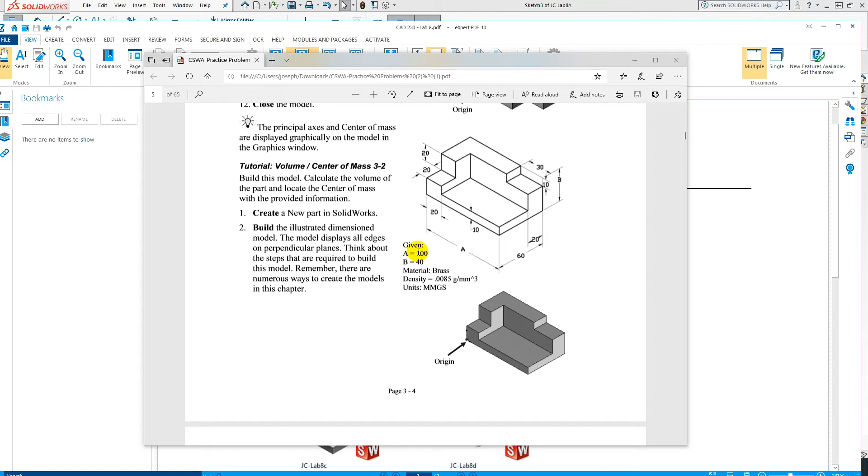Lab 8B. We're going to be modeling this part and then calculating out the mass property. We can find the dimensions for this in Lab 8 in the practice problems textbook, on page 3-4. And this is a metric drawing.

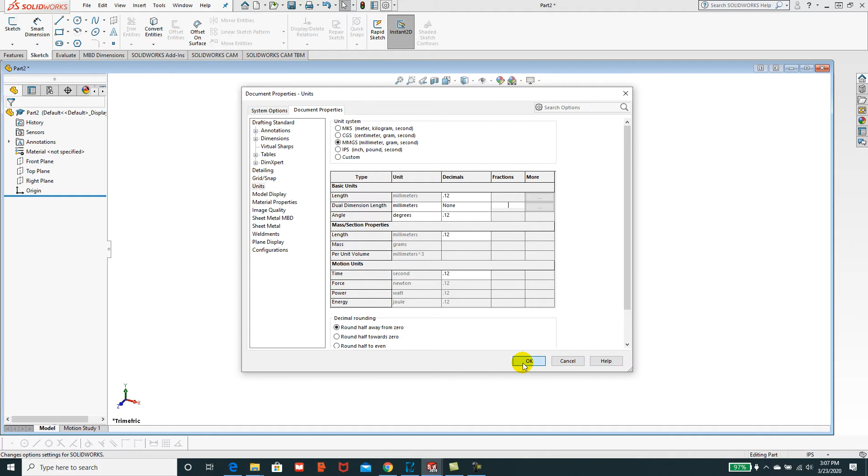Let's begin. We'll say File, New, create a part, plain white, document settings, document properties, units: MMGS, millimeters, grams, and seconds. Say OK. We'll see that that's been updated.

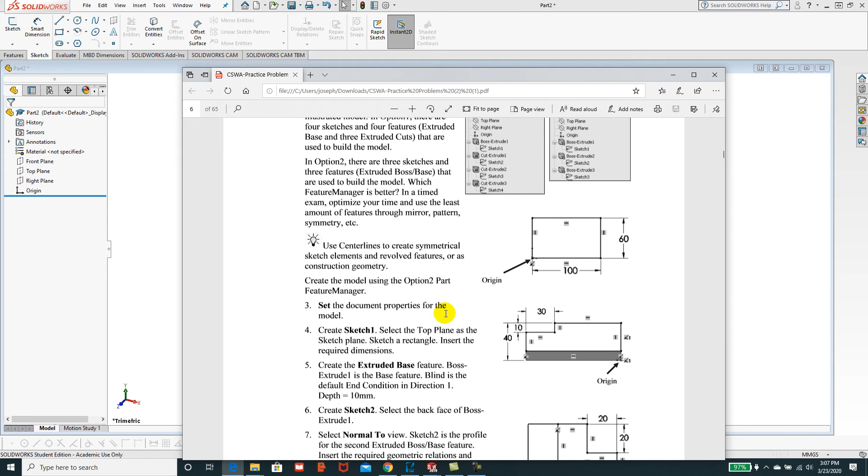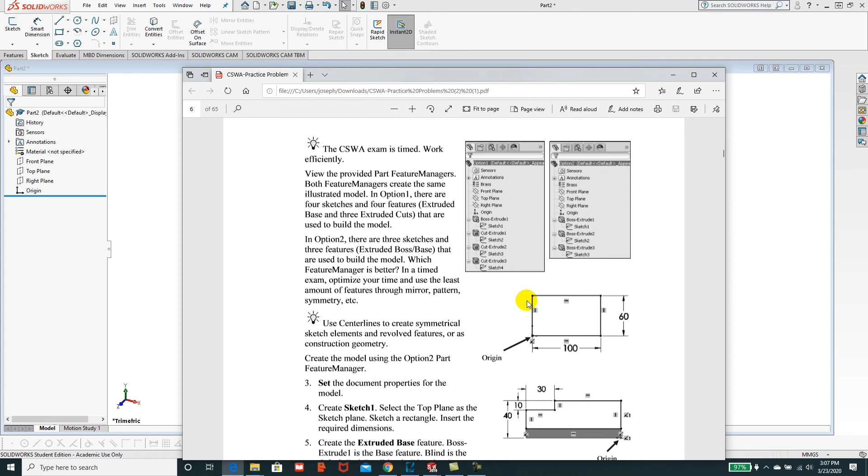And we'll create this model, create a new part, and we're looking for the origin. The origin is right here in the front left-hand corner, and it looks like they're starting it on the top plane. They're going to start off with a 100 by 60 millimeter rectangle. Then we're going to come into a side view and sketch a relief that will be cut from that. So we're going to have 100 by 60 - let's check that matches up, 60 and 100 - and then we'll extrude that a height of 40.

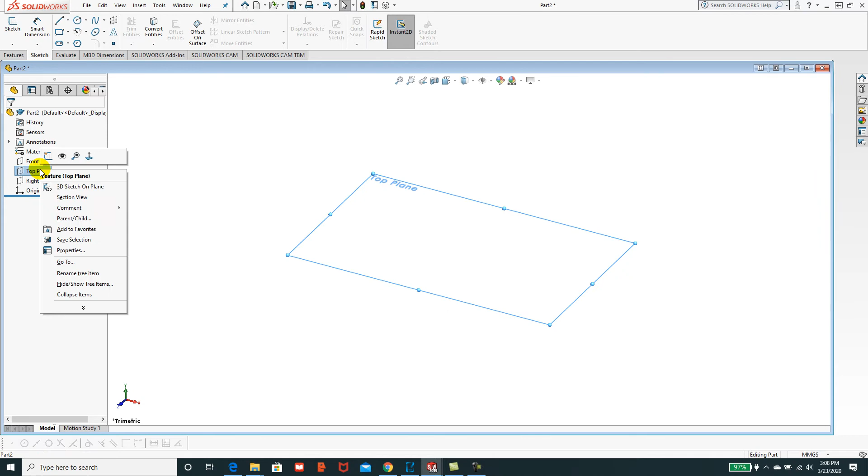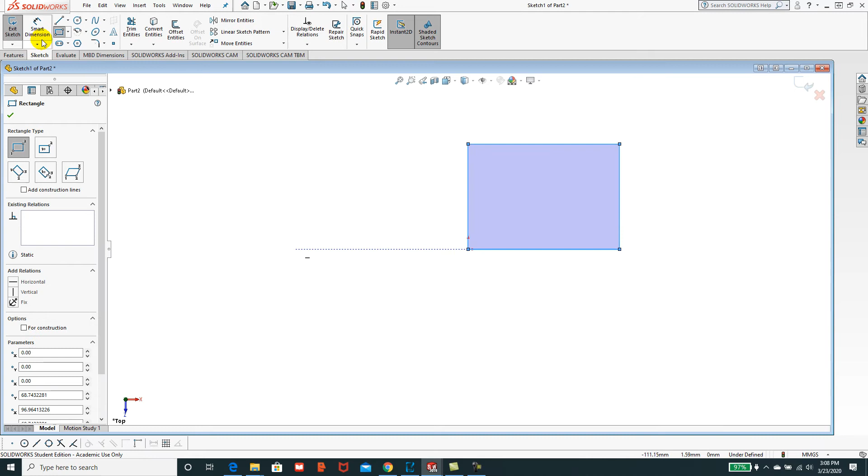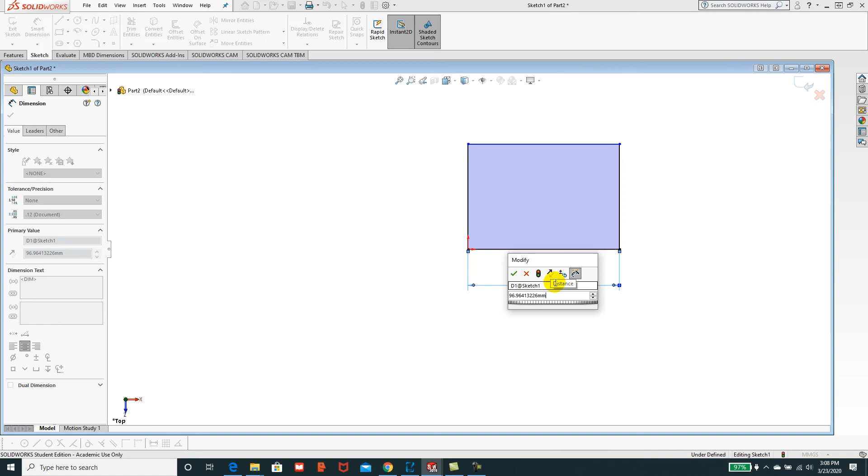Starting off in the top plane, right click, start a sketch, get a corner rectangle, and then we'll put our dimensions on that. I'm not sure why they're not taking - this one should be 100. It's because my number lock is not on.

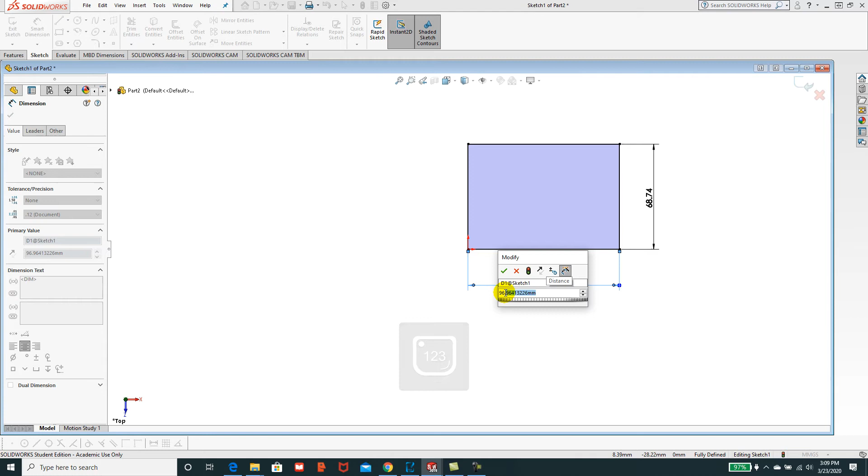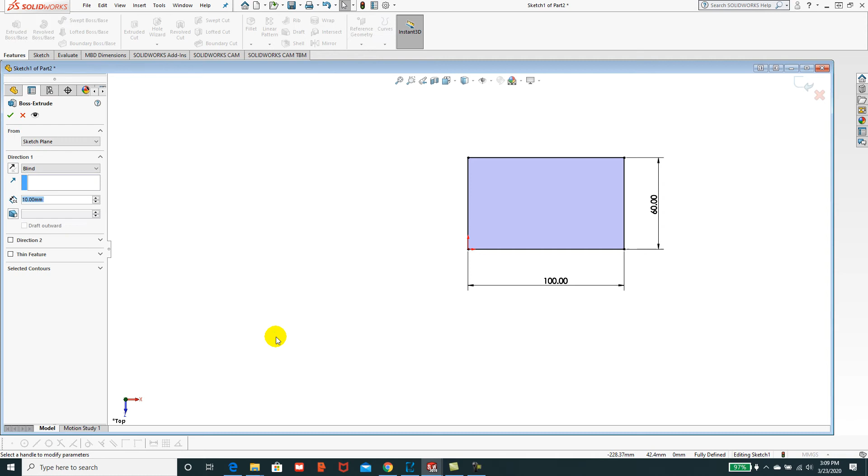And then we'll extrude that by going to Features, Extrude Boss Base, 40.

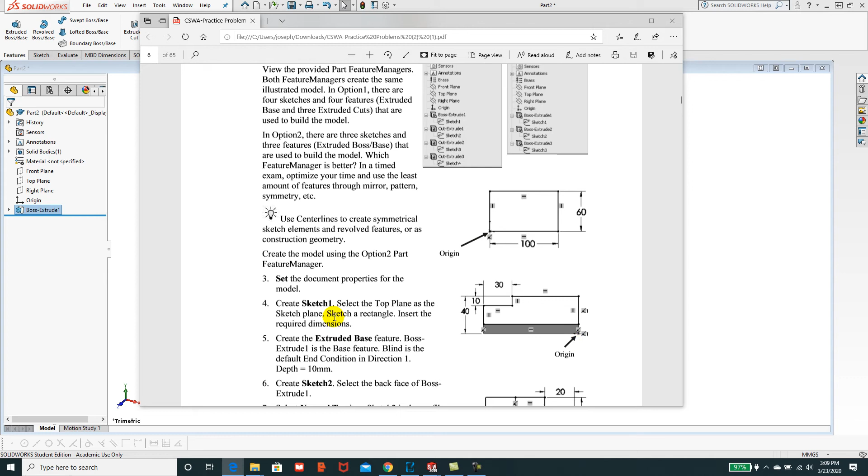We'll then go to the side view, and it looks like the origin's over here. It says create a sketch view in the top plane. Select the back face of the boss extrude. Let's just take a look at that. Okay, so we've got this extruded.

We could certainly just go and plunk some stuff down on the top with a perimeter of 20 millimeters this way and 20 millimeters that way. So let's do that.

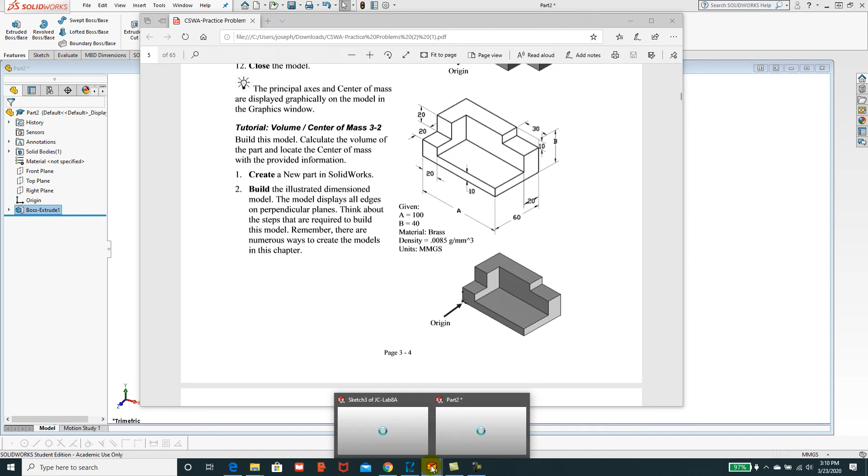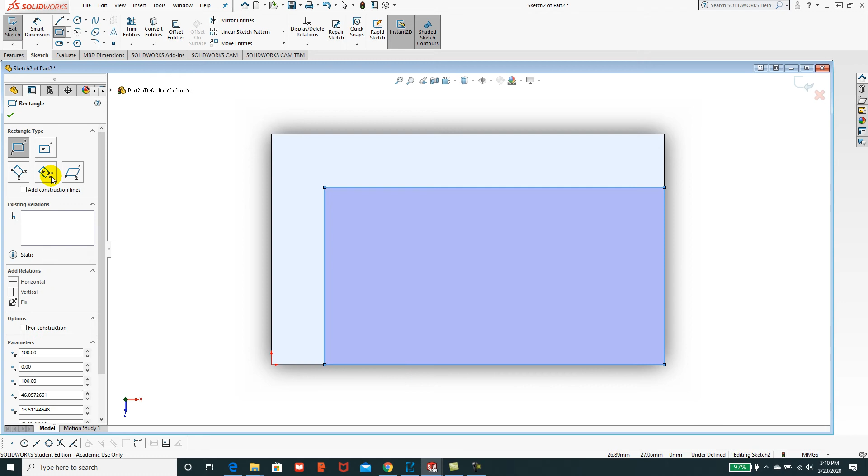Sketch on the top. Start a sketch. Spacebar. Normal To. Sketch. Rectangle. I'm just going to drag a rectangle like that. And I'm going to say we're going to have 20, and we're going to have 20.

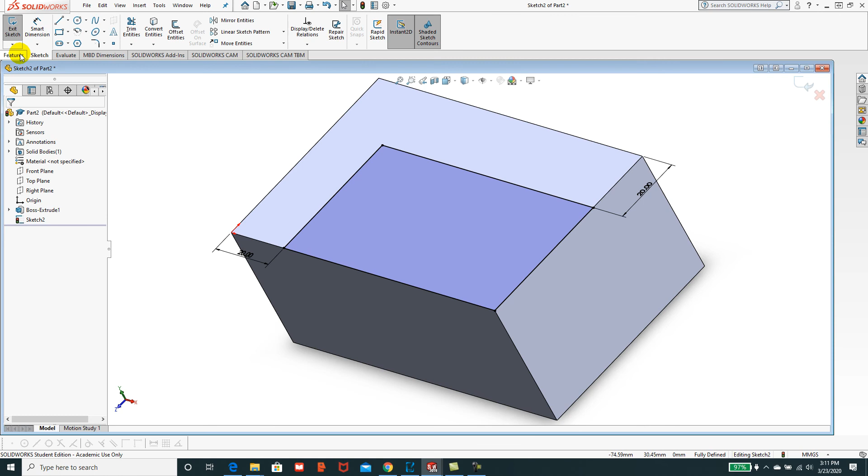And then we're going to extrude cut that. Let's take a look at how much. If that's 40 and we need to have 10, then we're going to take that down to 30. So we'll say Features, Extrude Cut, 30 millimeters, green check mark.

Great, take another look at our print. And then we're going to have a 20 by 20 by 20 cutout here and a 20 by 30 by 10. Since the depths are different, we're going to do those as two separate sketches.

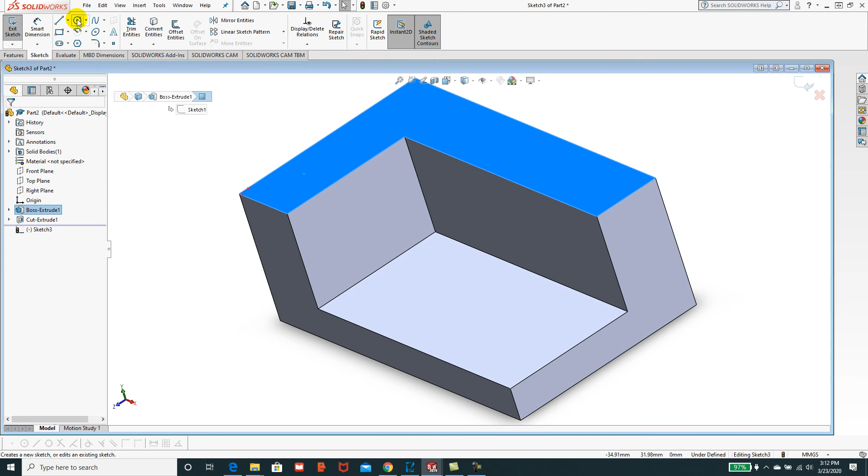We'll start off with this one. Click on the top surface to sketch, and then we're going to go and just drop that. Make sure you acquire the edge of that and the edge of that - they'll turn orange. And that fully defines that, so what we'll do now is extrude cut 20 millimeters.

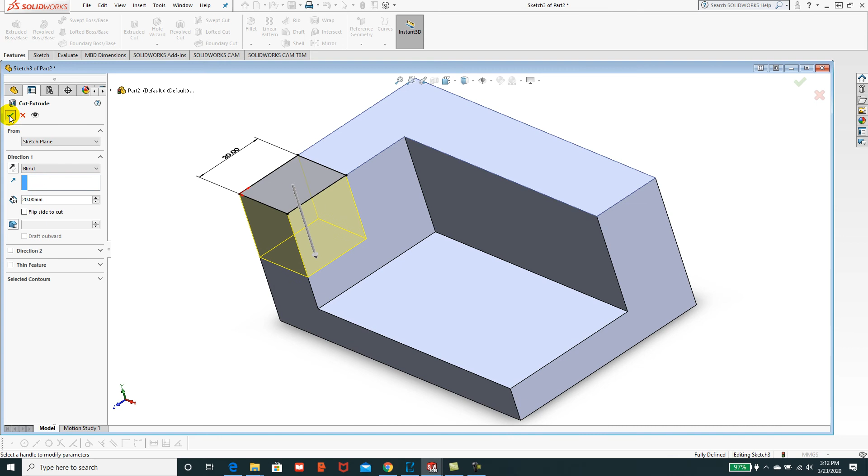And then we'll click over here, start another sketch, and create another rectangle. Acquire that edge, and then we'll take a look. And that's going to be 30 by 10 deep. Since the width is 20, as long as we grabbed it and acquired that when we created the sketch, it's fully defined.

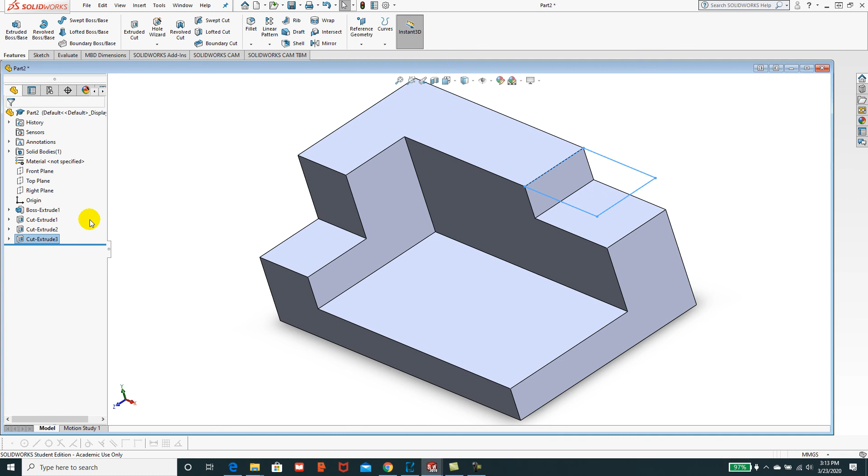Features, extrude cut, and we're going to say 10, green check mark. All right, so that models the part. Let's take a look at what else we have on here.

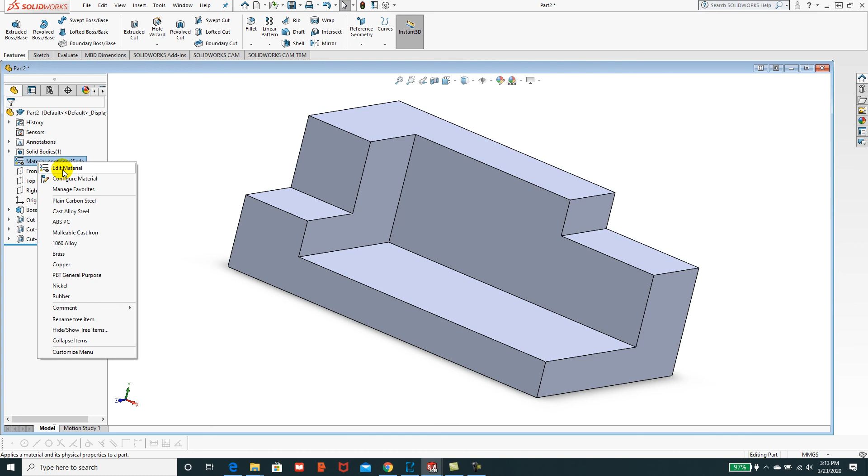The material that we're going to use for this is brass. So we're going to go and assign the material by right-clicking material and say edit material, and we'll collapse the steel. Brass is a copper alloy, so we're going to expand down copper alloy. We're going to select brass, apply it, close it.

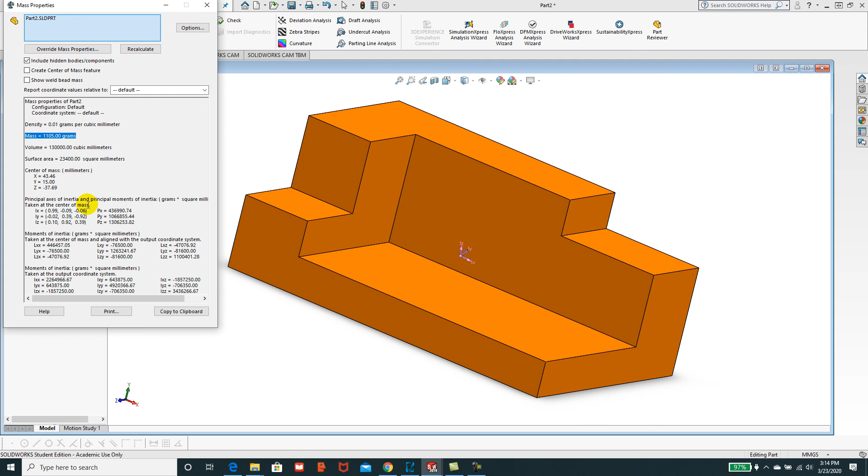And then we're going to calculate by going to Evaluate, Mass Property, and our mass is given at 1105. I'm going to copy and paste that. Let's take a look and see if they've given us that solution. Yeah, and so they've calculated out the same in the solution in the manual.

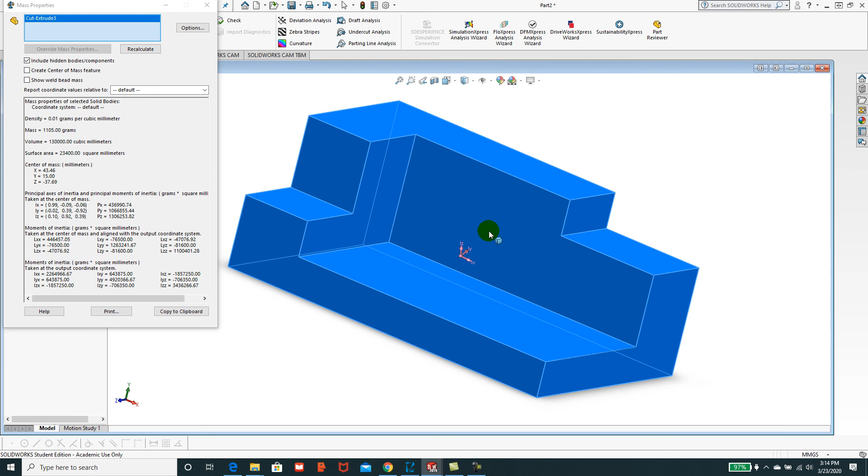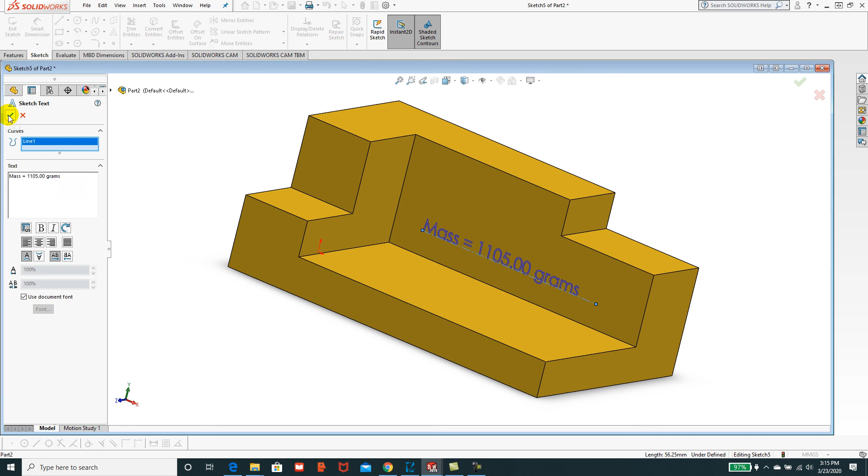Again, I like to put the numbers right on the part. So I'm going to come over here and start a sketch on the part. I'll say start a sketch. And then I'm going to go and draw a center line, construction line, right, like that. I'm going to hit the letter, select the curve, select the text, paste it, green check mark.

And then I'll save this as Lab 11B - excuse me, 8B. And that completes this exercise.